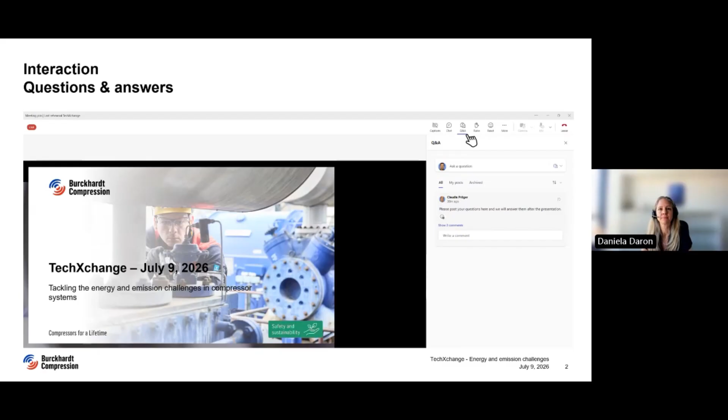In our TechXchange webinars, we aim to bring you expert insights and the latest updates on reciprocating compressor technology and service. Today we will focus on energy efficiency and emission reduction. Here are the key takeaways you can expect from this session. You will better understand why energy optimization and emission reduction are critical for compressor efficiency and your sustainability targets. It will help you identify sources of energy consumption, and you will learn how to track emissions within a compressor system. With practical solutions, we want to help you discover how to reduce energy consumption and cut emissions.

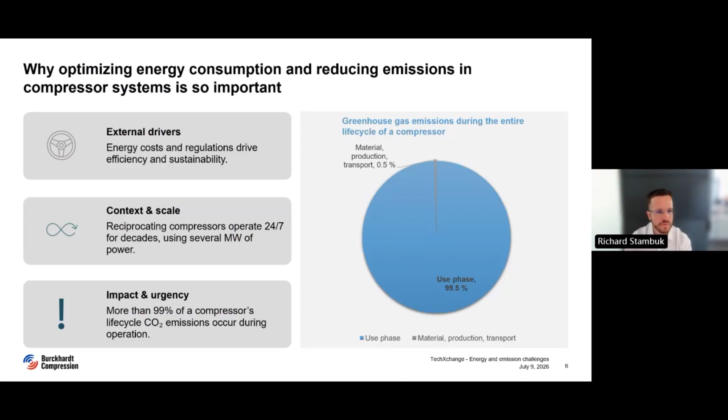With that in mind, let's look more closely at where that energy is consumed and where the emissions actually come from. Starting at the top, the drive power enters the compressor system, and most of the energy is converted into useful gas compression. But part is lost through friction, heat generation, mechanical inefficiencies, and leakages. In many cases, a significant portion of the gas being compressed is recirculated within the system, meaning energy is consumed to recompress the same gas without contributing to the process.

There are two different types of emissions. First, we have the indirect emissions that are associated with the electricity required to operate the compressor. They are driven by factors such as drive losses, valve performance, friction, heating effects, and operation away from the optimum efficiency point. The second are the fugitive emissions—these are the physical releases of the process into the atmosphere through packing leakages, covers, pipe leaks, venting, and flaring. While the volumes might be smaller, the environmental impact can be significant, and they are also related to safety concerns and regulatory risks.

The key takeaway is that emissions do not come from a single source. They originate across the entire compressor system and contribute to the overall CO2 footprint, operating costs, and product losses, but each requires a different set of solutions.

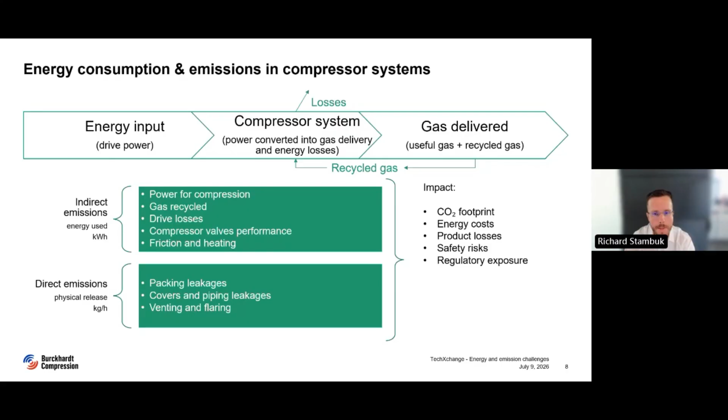Before we recommend a single upgrade, we believe in one principle: measure first. This is BC Activate, our structure assessment for your compressor. It's not guesswork. We monitor power efficiency to see how much energy you're really using per unit of gas.

We run a performance assessment using PV analysis and simulation. We carry out efficiency analysis to quantify the saving potential, thermal measurements to catch abnormal temperature, and leakage detection to find out the leakage and escaping gas.

We put all these real numbers into our CO2 emission calculator. The result is that every recommendation we make is backed by data, from your machine, not by assumptions.

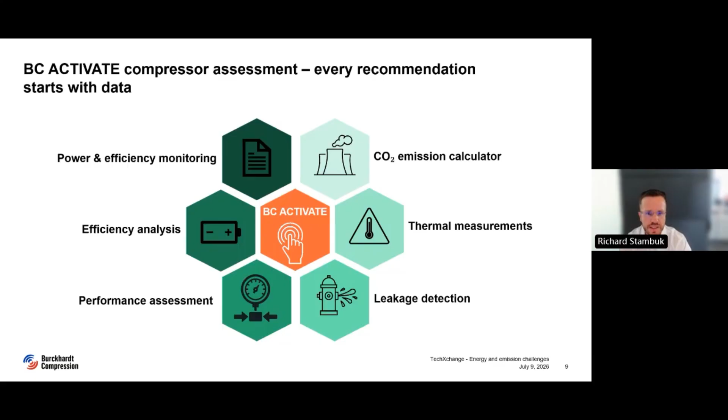That brings us to a point that's often misunderstood: the close relationship between efficiency, optimization, and reliability. It is tempting to think that reliability and efficiency are two separate goals, but they are deeply connected.

Look what happens when reliability is poor. Components wear out quickly, you get frequent stops, and those stops mean flaring, burning of gas that you already spent energy compressing. At the same time, as components degrade, performance degrades gradually and the machine quietly consumes more and more energy for the same output.

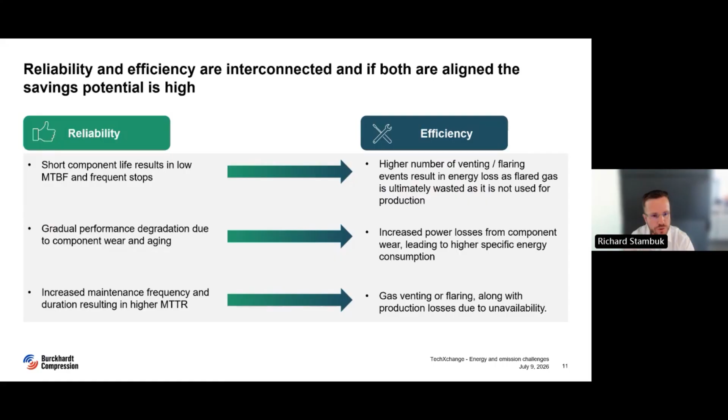And the third connection is maintenance related. As equipment reliability declines, maintenance interventions become more frequent and often take longer. Every maintenance stop creates a period of unavailability, reducing production and potentially requiring gas venting and flaring during shutdown and restart activities. In other words, reliability issues don't just increase maintenance costs, they directly contribute to emissions and production losses.

So how do we actually unlock that potential? Our method is straightforward. We start with on-site data collection using our BC Activate: pressure, temperature, flow, current, and PV measurements, all from your running machine.

Then we compare the real data against our reciprocal theoretical model, which shows us the gap between how the machine is performing and how it could perform.

From there, we build a simulation and optimization plan using our CO2 emission calculator that highlights the biggest CO2 contributors, with a concrete action plan and an estimate of the emission reductions and return on investment. In other words, you get a quantified and prioritized roadmap.

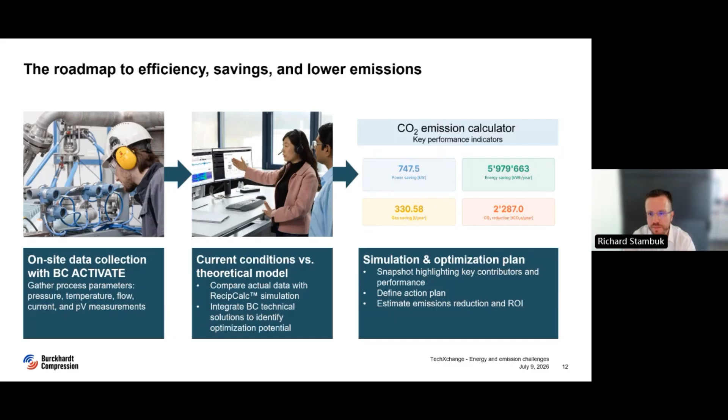Hello, everyone. So far, we have discussed where energy losses and emissions originate and how they are measured. Let's look at what can actually be done to reduce energy consumption and eventually improve compressor performance.

As mentioned in the previous slide, when we talk about emissions, we are talking about leakage coming directly from components like valves, sealing systems like packings, pistons, piston rings, and rider rings. With operation and over time, these components wear, leading to increased gas leakage, reduced efficiency, and more frequent maintenance interventions.

These issues create a chain reaction: higher gas losses, higher power consumption, reduced compressor capacity, and increased risk of shutdowns and flaring events. To address these issues, we focus on upgrading the critical compression components.

Our solutions start with high efficiency valves to reduce pressure loss, improve overall compressor efficiency, and increase runtime by minimizing wear and optimizing flow paths.

Sealing system upgrade with the latest design and materials: modern sealing geometries and advanced materials reduce leakage to an absolute minimum while increasing durability and reliability.

Our new Redura packing solution uses optimized ring designs and state-of-the-art material technology to extend component lifetime, improving sealing performance and reducing maintenance effort. Also, packing with purge and buffer functionality prevents process gas from entering the distance piece.

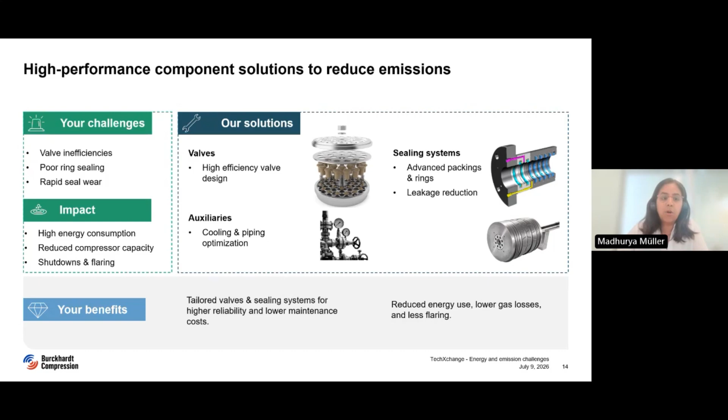Now, capacity control solutions primarily target indirect emissions. A common challenge is that process demand is rarely constant. Many compressors continue to operate close to full capacity even when the process requires substantially less flow. In these situations, energy is being consumed without creating value.

There are several ways to match compressor output more closely to process demand. First is stepwise capacity control using suction valve unloaders and clearance pockets. This enables discrete capacity reduction in steps. It is a simple and robust solution for stable operating ranges.

Another way capacity can be controlled is via a variable speed drive. It allows continuous adjustment of compressor speed and matches output precisely to real-time process demand.

For applications requiring greater flexibility, reverse flow control can provide stepless capacity adjustment. This is achieved by unloading suction valves during the compression stroke, which prevents unnecessary compression work and reduces energy losses at low load conditions.

The benefit is straightforward: the compressor only delivers what is actually needed by the process. This way, it can create significant energy savings. For example, a 5% reduction in power consumption on a 2.5 megawatt compressor operating 8,000 hours annually saves approximately 1 million kilowatt hours per year.

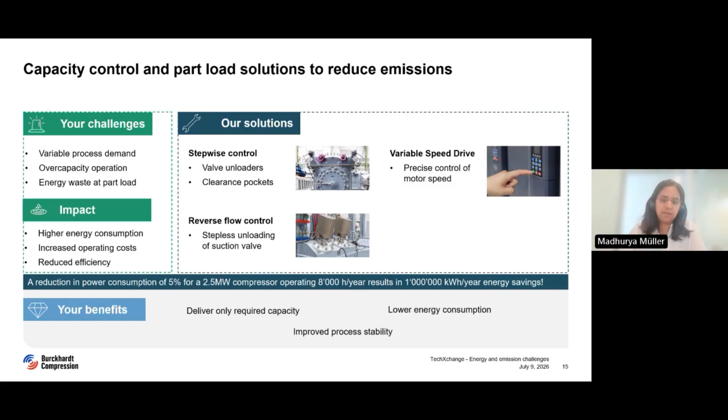Let's look at a few practical examples, starting with a customer who was primarily focused on leakage reduction and regulatory compliance.

This non-Burckhardt compressor was installed at a refinery and was experiencing significant leakage and reliability issues. Not only were the compressor components like valves and sealing systems facing problems, there were strict HSE requirements that had to be complied with. So rather than continuing to maintain the existing design, Burckhardt took a complete revamp approach to solve these issues.

We applied reverse engineering techniques and designed new API 618 compliant cylinders. The scope included not only the cylinders, but the complete internals like piston ring, rider ring, valves, new piston rod and packing systems, buffer panel, new motor, and a modern capacity control system integrated with a new and updated control panel.

The outcome was very positive. Leakages were reduced to zero, reliability improved significantly, and the compressor became compliant with current HSE requirements. This case demonstrates how a targeted revamp can extend asset life while delivering substantial environmental improvements.

So that's an example focused on direct emission reduction. The next case focuses on reducing indirect emissions.

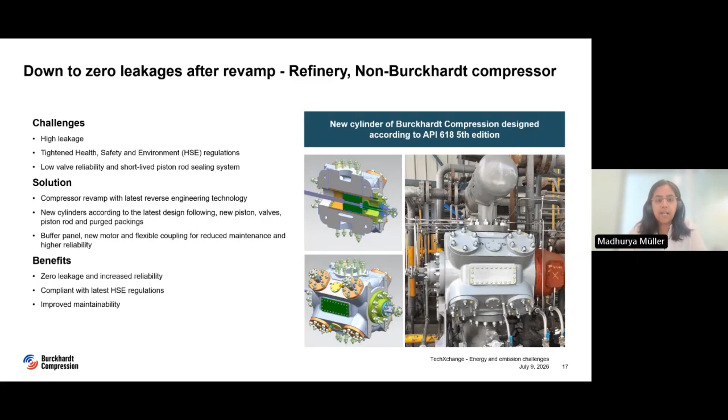Our second example comes from another refinery application. But here the objective was different: the customer wanted to understand whether there was untapped energy savings potential within the existing compressor system.

In this installation, the customer had two 3.5 megawatt compressors. One unit is usually operating while the other is on standby, with approximately 4,000 operating hours per year on each compressor. During our assessment, we found that the existing capacity control equipment, that is the clearance pockets and the valve unloaders, were not being utilized.

This created an opportunity to improve part load efficiency, and we evaluated two options. Option one was relatively simple: reactivating the existing clearance pockets and valve unloader system. This solution required very little investment and could achieve approximately 3,000 megawatt hours of annual energy savings. However, the control range was only up to 40%.

Option two involved a stepless reverse flow control system. While this approach required higher capital investment, it could reach up to 25% capacity control range and achieve almost 4,000 megawatt hours of annual savings, maximizing the available efficiency potential. This example highlights the value of performing a detailed assessment before making any investment decisions.

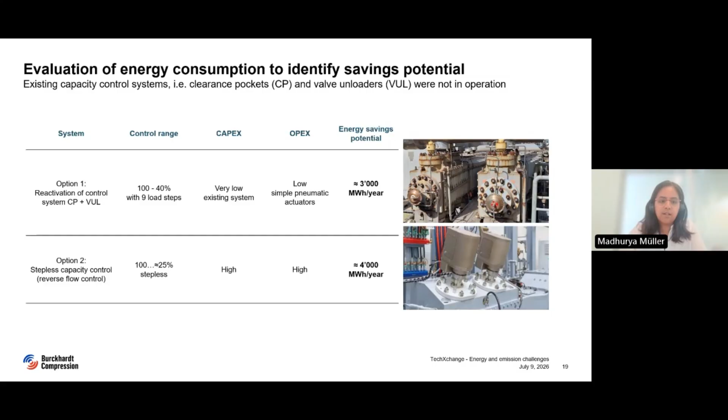To conclude, these are our key messages. First, energy efficiency and emission reduction have become key operational priorities, driven by both operating costs and sustainability requirements.

Second, before developing and implementing any solution, it is essential to understand where the losses occur. A structured assessment is the foundation for achieving measurable results.

Third, there are proven solutions available today, from sealing and valve upgrades to advanced capacity control systems, and from complete compressor revamps to maintenance strategies. We can develop the most suitable solution in each case.

So what can you do next? Think about how you can evaluate your compressor systems for energy and emission improvement opportunities.

At Burckhardt Compression, we support customers through our BC Activate assessment. This allows us to analyze compressor performance, identify improvement opportunities, quantify potential energy and emission savings, and develop tailored solutions based on your operational needs.

The goal is simple: reduce operating costs, reduce emissions, and improve compressor reliability while maximizing the value of your existing assets. And if you're interested in exploring these opportunities at your site, we'd be happy to discuss your specific challenges after this discussion. Thank you very much.